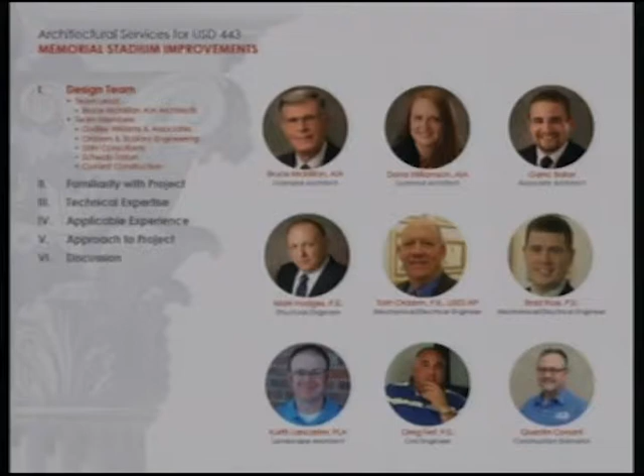We've had the opportunity to work alongside an excellent team of consultants that we bring to you for this project. I toured the facility this afternoon so I had seen it, but I had not actually walked it as well as we did this afternoon. So we feel we do bring some expertise to the project for you.

The folks we're showing you here - top row, myself, Dana, and Garrick Baker at our office in Manhattan. Mark Hodges is a structural engineer with Dudley Williams and Associates in Wichita. We've worked with that firm for most of the last 35 years, and we rely on them very heavily for our structural work. In our review this afternoon, we know there could be some structural work involved, not just with implementation of the locker rooms, restrooms, and so forth, but also the booth up on top, where you want to look at some expansion. That's going to take some additional structural evaluation - how does that get implemented and what impact is that going to have on the facility as it now stands. As I said, we would rely heavily on Dudley Williams and Mark and his team to work through that with us.

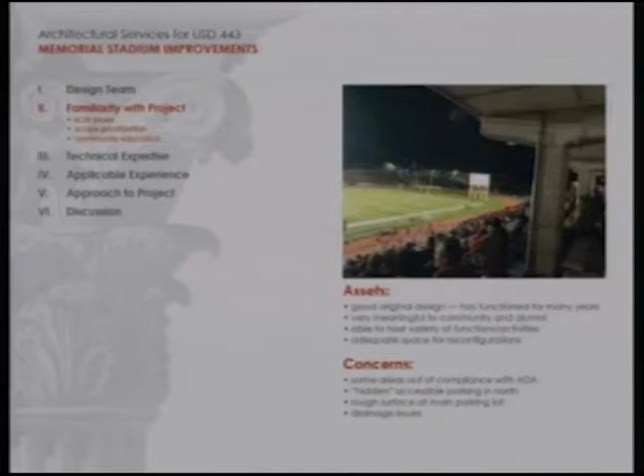So as you noted in your request for proposal, you want to do things in phases, maybe some phases together, but just however that might work for the community and for your needs. And we can definitely work with you on that.

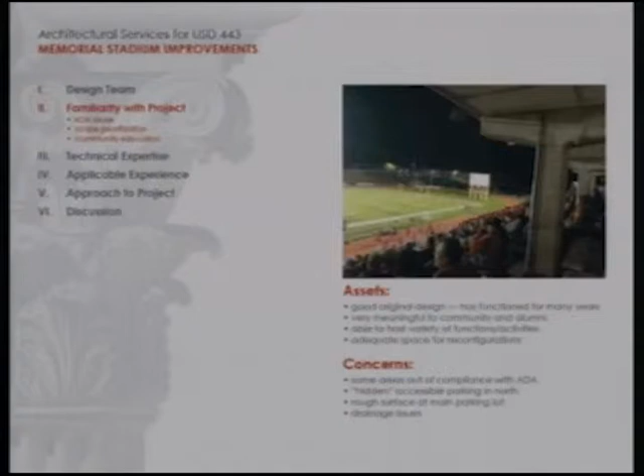We do feasibility studies, and that's probably how we would propose to begin, and that way we could investigate all of the issues that you're looking at and work through how to prioritize them, how those work into a budget, and how those would phase according to schedules as well, because there are a lot of activities going on in the stadium that we'll probably need to work around.

So those challenges that we really want to focus on would be to address the issues, as many issues as we can within a budget. And that would be something that we could work on together to determine.

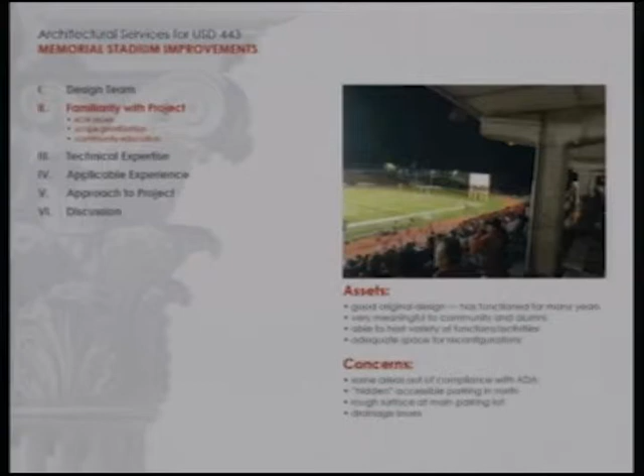We want to make sure we schedule those priorities to meet those different deadlines. And then for that phase 1, I know when I talked to Dr. Dirksen, the Shrine Bowl is kind of a goal for phase 1, and so that would be something that we might have to fast track. We can look at that later on when we talk about our approach to the project.

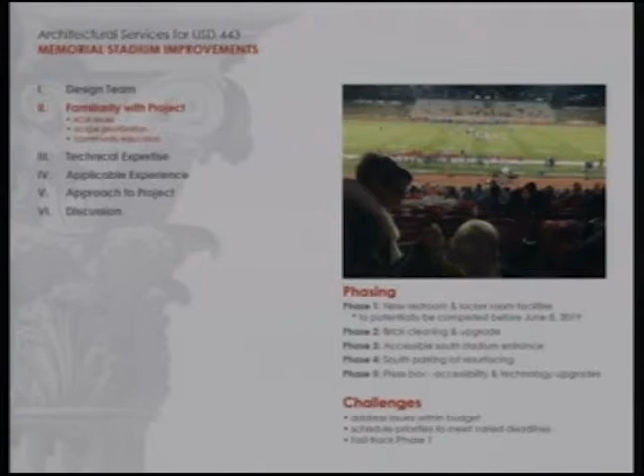Okay, Bruce? With respect to the, let me make sure I get this. There we go. I want to go to the next one. Yeah, there we go.

A little bit of background here on our team collaboration, the design skills that we bring to your project, and the cost control and deadlines. We've had the opportunity most recently to work on a very large feasibility study and master plan for USD 383 in Manhattan in conjunction with the City Commission.

The feasibility study is a large study to combine sports facilities with the school district and city-owned property and city-owned facilities. What we're showing you here is a series of study models completed for a bond issue that was just recently passed, a $129.5 million bond issue. We're working through those components as well.

A previous bond issue allowed for additions to the middle schools that will combine gymnasiums and recreation centers for city use by the school district for class and activity expansion. At a certain point in the day, maybe 3 or 4 o'clock in the afternoon through the evening hours, it reverts back to city use. Those are additions to the middle schools - we have two middle schools, Eisenhower and Anthony, in Manhattan USD 383.

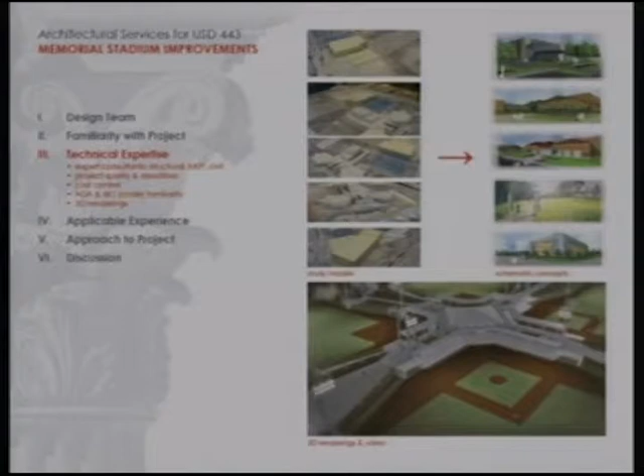The skills we've brought to these projects are a direct result of our long-term working relationship with the Parks and Recreation Department for the City of Manhattan and the Community Development Department. We've been working with Community Development since the 1980s, and through Parks and Recreation, we began working with them in 1985. We've been consistently retained over these years for projects for both departments at the city. As our original proposal indicated, we've done a considerable number of projects for USD 383, USD 320, which is Wamego, as well as we're working for St. Xavier's Catholic Schools in Junction City right now as well.

So we bring that background to your project here and series of projects, as Dana has described, in a phased implementation process. All of these projects are going in as a phased implementation as well.

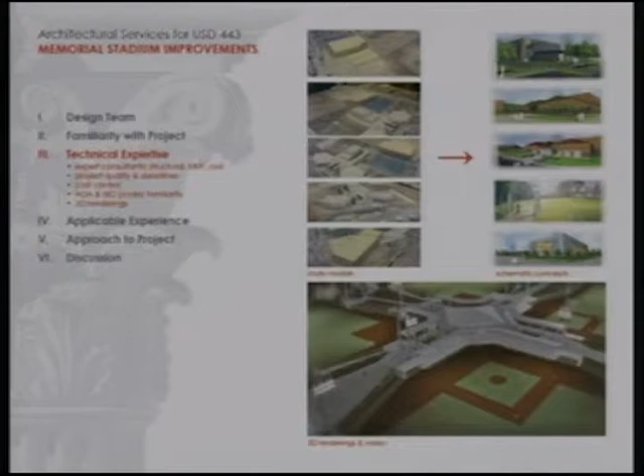How involved were you in the redevelopment of the city of Manhattan back in the 90s - the mall, the north and south districts? Basically, all of those situations were worked on with outside firms. There really was no local firm involved. The mall was done by a developer. The North District, where Hy-Vee is, that was a developer. The South District, the Arts District, again a series of developers. Okay, that makes sense, I was just curious.

The needs of each of the projects we've identified have been thoroughly researched, and we've gone through these on an individual basis. The school district, as well as the city, met multiple times on these projects as well.

A lot of the projects we've done over the years have been maintenance projects - parking lots, we've done a zillion parking lots for USD 383, bleachers, window replacement. A lot of maintenance projects have gone through our firm for the school districts we've worked with over the years.

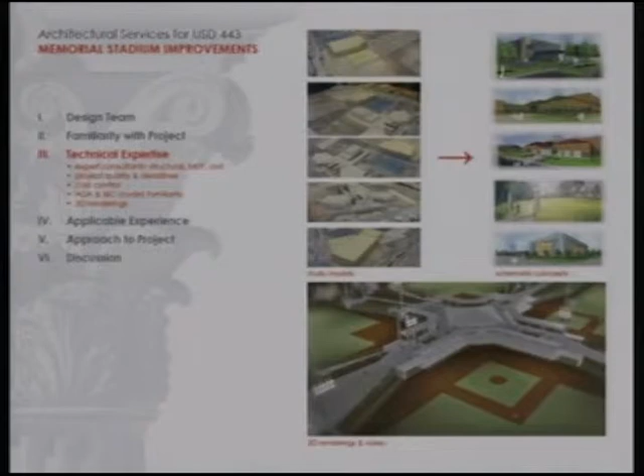The collaboration I've mentioned with our team members before - we've worked through those with all of these firms that we've represented here this evening as well.

We're known for quality design. The working drawings that we bring to a project have been observed to be some of the most detailed, highest quality, and have the fewest callbacks, clarifications, and other issues. We have very close working relationships with our local contractors, and we use firms specifically when we have the opportunity, and we understand that this is probably could be a competitively bid project. We have a contractor on board with us on that. However, that is for cost estimating purposes at this time. But we understand that there may be competitive bidding, and we're very comfortable with that as well.

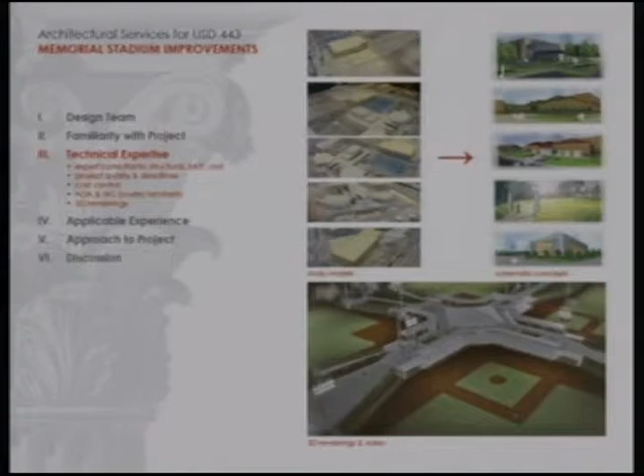Deadlines, we have been very cognizant of those kinds of issues as we have worked through these projects as well. The documents are checked, double-checked. Our consultants cross-check our documents, we cross-check their documents to be sure that we haven't lost something in a loophole somewhere.

Are there any other questions at this point? Dana, would you be the lead on this project? Yes.

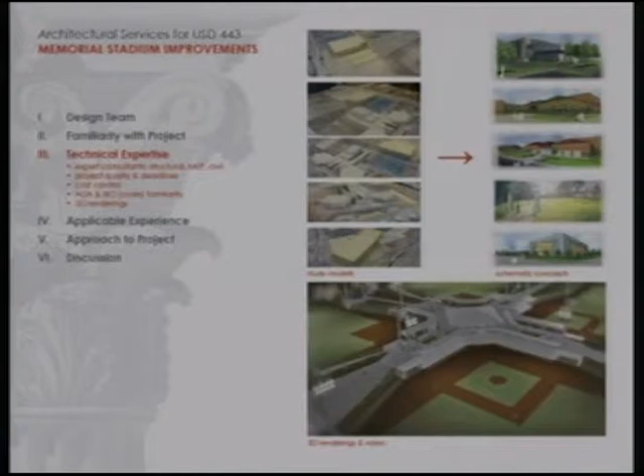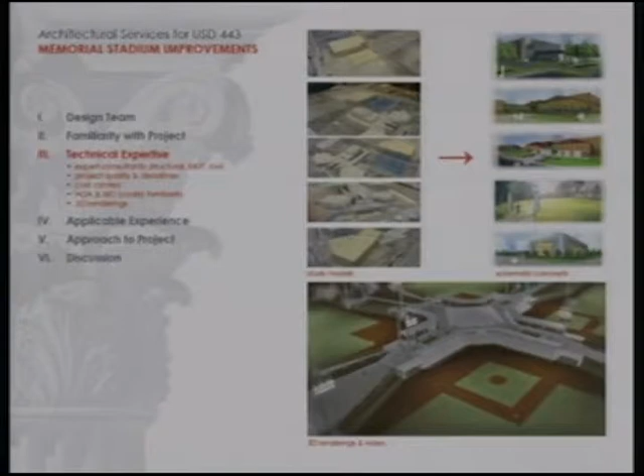Yes. We have other folks in the firm as well, and all of our document preparation is electronic through CAD systems, and we can plot, print, we can do everything all through a single server. That allows us to keep everybody in the loop on what is going on with projects. Go to the next slide.

Okay. We'll do a tag team on this one here.

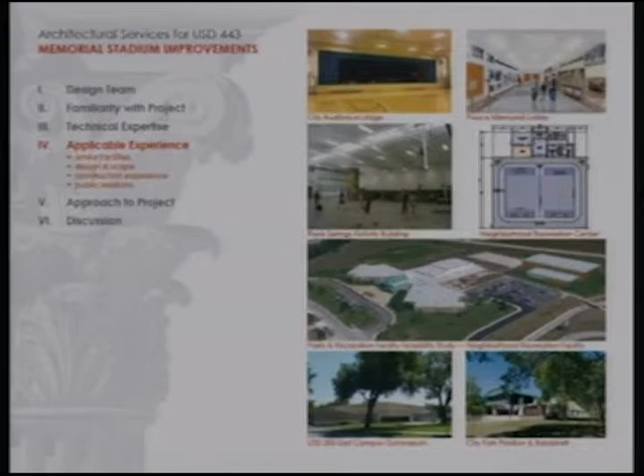As far as the similar facilities are concerned, again, these are projects I've mentioned. This project is one of the middle schools with the recreation and gymnasium component that would be attached or on an adjacent parcel for one of the recreation centers at one of the middle schools. This project is actually a predecessor to the Southeast Neighborhood project that we're working on, 17,000 square feet. Standard court, 2 cross courts, pickleball, volleyball are included as well. Locker rooms and restrooms, yes.

My pointer's not pointing. Am I dead? Maybe. In the upper right, you're way up there. I'm way up there. There you go.

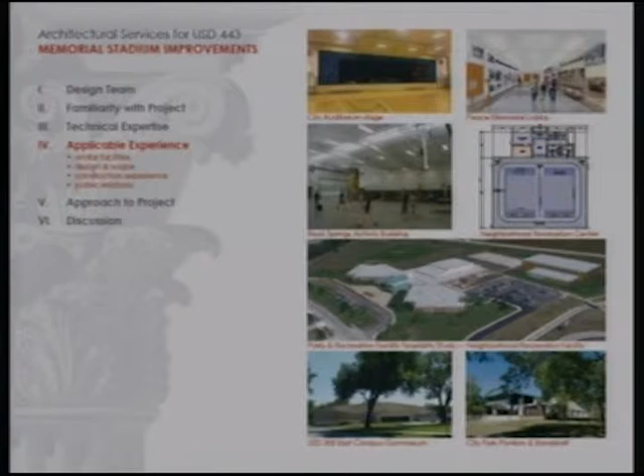There we go, okay. That is a project that we did for the city in conjunction with this auditorium renovation, which we have just finished. And this is all done through a veterans organization that is honoring those World War II veterans from Riley County.

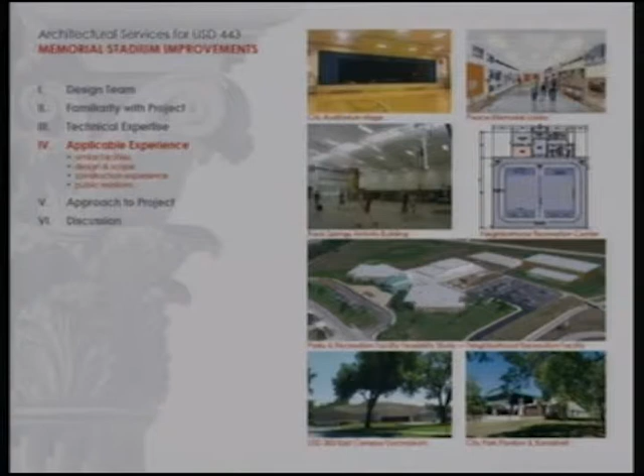Here is the gymnasium at the East Campus for the high school. With an addition, we redid that in the last bond issue, and then a large pavilion and outdoor stage area as well. So those are just some similar projects that we've had the opportunity to work on.

So our initial thoughts on how we might approach the project, going back to phase one and how we might fast track that. That is going to be pushing it, but I think we've worked out a schedule that is pretty doable, and I've spoken with Quentin Conant, and he thinks it's doable as well. So as long as we can make decisions and everything goes right, which, you know, construction.

But just thinking about getting the contracts approved by the end of the year, we can get started in the new year, get going on schematic design in January, and maybe get everything approved, start working on construction documents through February. We've got 2 weeks in March, the first 2 weeks, for bidding, and then that leaves 2.5 months for construction. And then we're done before the Shrine Bowl.

So, like I said, our design philosophy is that we want to make sure your needs are met. And that means within the design, not just how it looks, but how it functions as well. Also with finance and also with your timeline, all of those needs. So we have to make sure those all coordinate. And this fast track schedule is our attempt at addressing that need. Any questions on that?

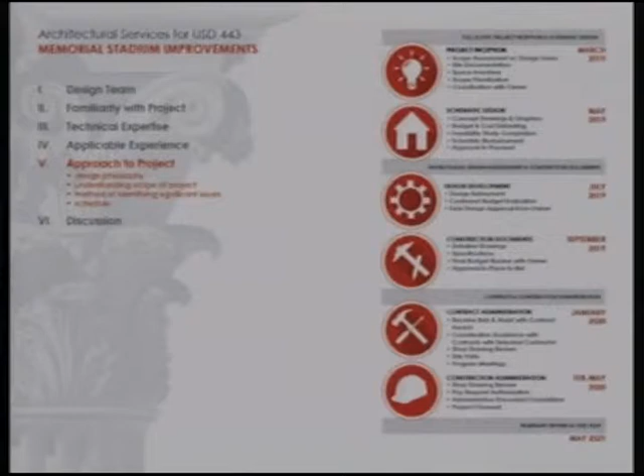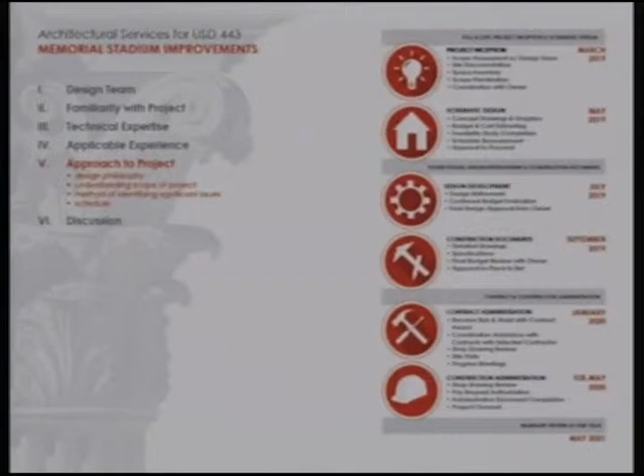All right, so then after design is finished on phase one and it's under construction, we can start thinking about identifying the rest of the issues, maybe starting on that feasibility study. That starts with meetings with you, with other key stakeholders, and working on identifying all the issues, investigating, making sure we have everything covered, and then we can get into schematic design in early or late spring of next year.

Work through design development and construction documents through the summer and the fall. And then it looks like we've shown maybe starting contract administration, working with the contractor, finding a contractor at the new year of 2020. And then once we get a contractor, we can work with them to figure out that schedule to work around all the events and all the people who need to use the stadium while it's under construction.

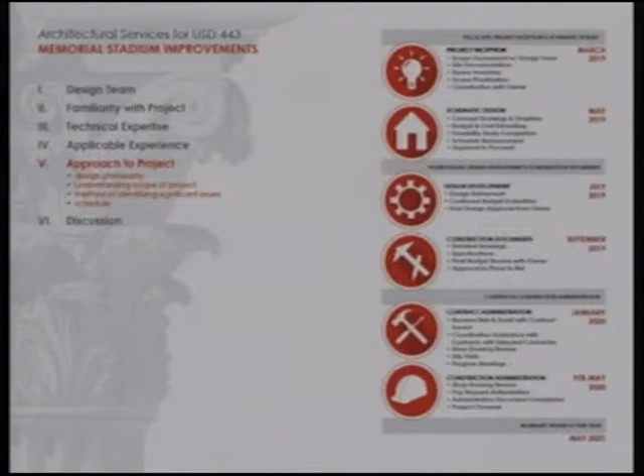Bruce, do you have anything to add to that? No, only that we're very cognizant of how much use this facility gets. When we were in there even this afternoon, the college track team was in there. The gate was open, by the way. We didn't anticipate that, but it was. So it was all secured, but we had an opportunity to really see what is physically there.

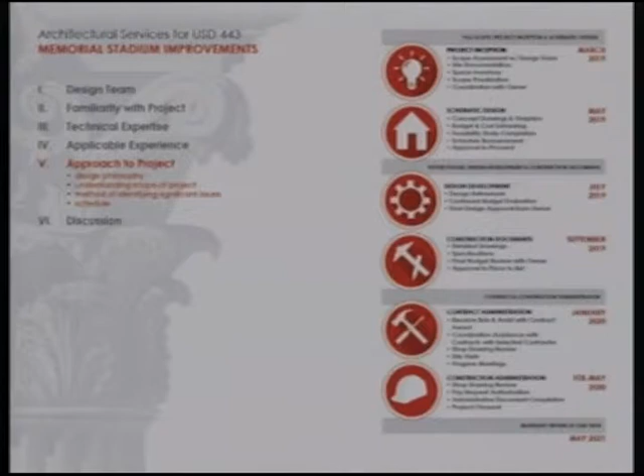And the structure, as Dana said, looks to be just in very good condition. Other than the press box, we may need to address how that modification might be taken into consideration there as far as that's concerned. But well, with that, we'll open it up for questions.

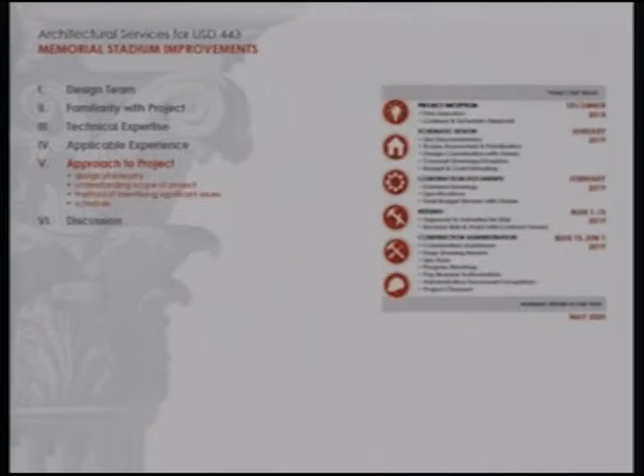On phase one, that's a pretty strict timeline. What would be the problems to meeting that? I mean, would weather hold you up? I'm just asking questions.

I think some of the initial problems would be during the design if we have problems making decisions on what is involved in that design, and that's within the design team, or that's between the design team and you. But I mean, those are easily overcome.

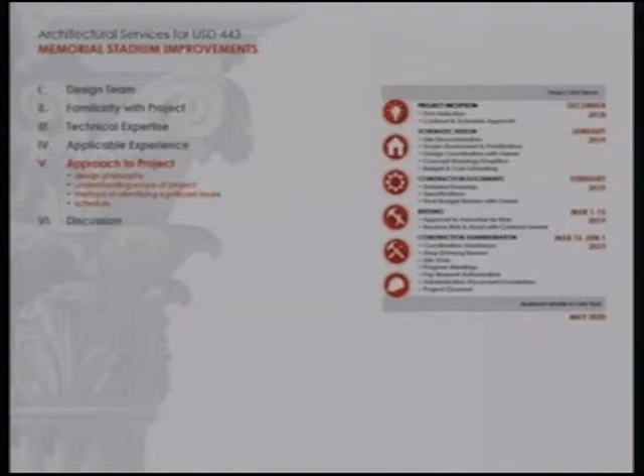But another problem that might come up is that drainage issue under the east stands that we talked about. It could be an easy fix, or it could be a much bigger fix. And if it's a bigger fix, obviously that's going to...

Could you determine the method, how big a fix it was? Is that by observation, or do you have to really get into it first? We wouldn't have to totally get into it, but there'd have to be investigative measures taken.

We would certainly want our civil consultant to take a look at this. And obviously, there needs to be some type of a subsurface drain issue that might have to go in there. If we can't get a slope that would work with that pavement under there, we'd have to get into some type of subsurface arrangement, I would imagine. His initial thought was it looked like there just wasn't a drain that was working, or maybe it was clogged, so we're just looking into the drainage issues that are there.

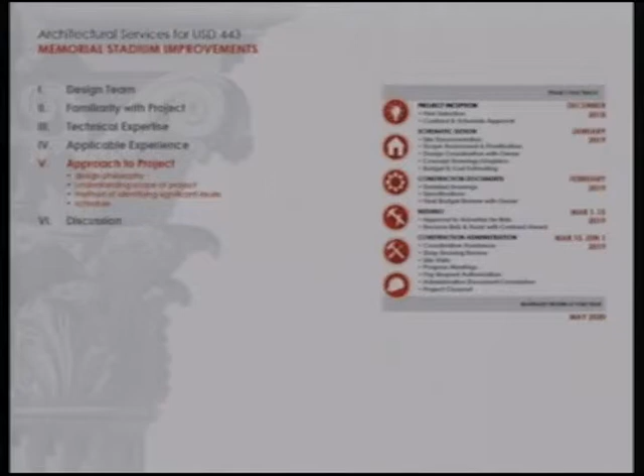At the risk of being a lone soldier out here, I'll hide my face when I say this, but if the Shrine Bowl isn't the end-all be-all, and we're not building for the Shrine Bowl, we're building for USD 443 in my mind, will what we get done before that deadline you've marked off as the Shrine Bowl -- I can feel daggers already from high school -- but will we be able to have a quality project?

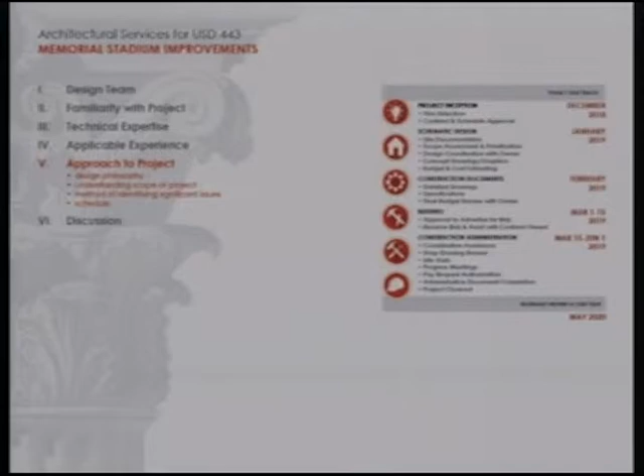What I'm saying is I don't want to just mishmash it. I want it to be, if we're going to do it, let's do it right. Let's not rush it for any particular one event, but make it a great facility so that in another 50 years, if somebody wants to build on and improve it even more, they can. But that's my concern: will it be okay, we do this, and then we have to undo this to do this, and then we have to undo this to do that?

No, that would not be our goal. Every time we do one of these phase projects, we try as hard as we can up front to figure out what needs to be done in this first phase so that we're not undoing as we do continuous phases. That's just a waste of money and time.

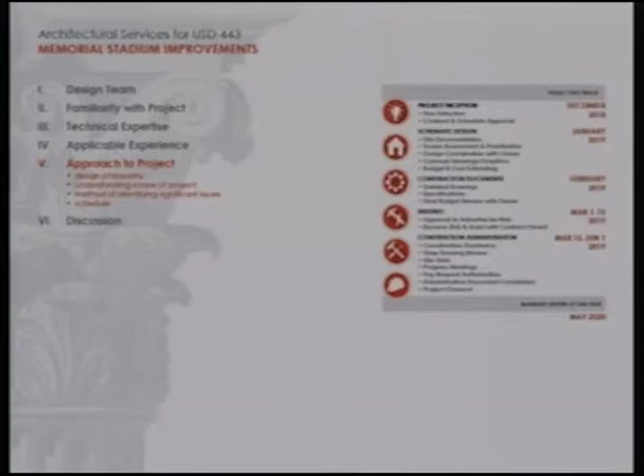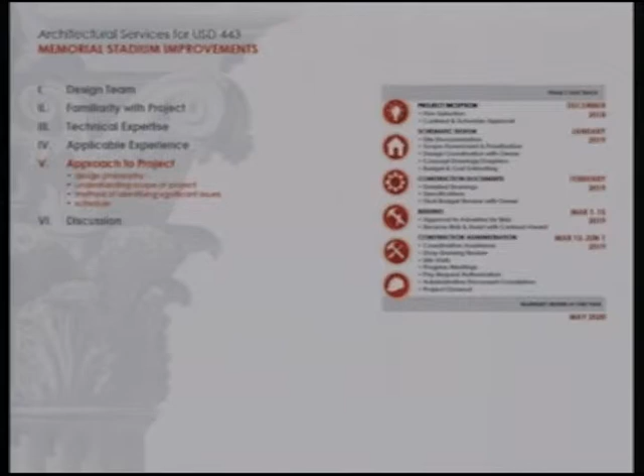I would like for the school boards 50 years from now to say what you said -- that they did a good job 50 years ago -- because that's great to know that we have a great structure still. It'd be worse if we were talking about some really significant structural problems. And that's not going to crimp our style in how we build anything. We won't say, oh, you can't do that now because we already did this.

Logically, if that is a goal to get, it's working with the locker rooms, it's working with the restrooms, and getting those are defined spaces right now. With that being there, you've got the four walls already to work with. Depending upon labor availability, construction availability, weather, and so forth, there should be enough time, because all of the plumbing is already there, as long as anything subsurface is still in good shape, rearranging should not be an enormous difficult problem. We have not investigated exactly what all of the existing ramifications are, but the point to start with, you have the infrastructure to make that possibly work.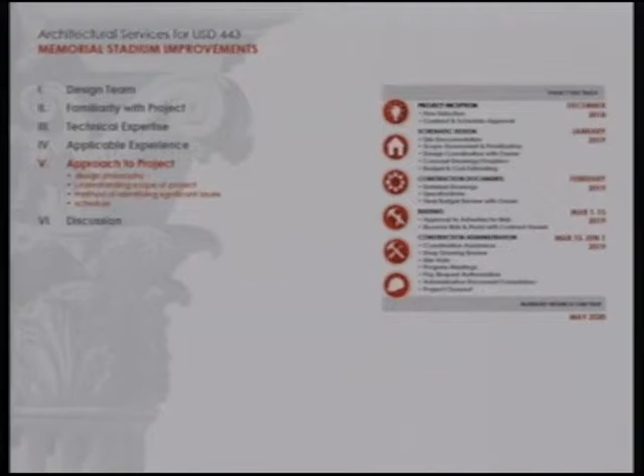Tammy and Pamela bring up a good point though. If we had no timeline, would you still recommend that we do these three phases in this order? If you had no set timeline, I would probably recommend that all of your phases be investigated in an initial feasibility study first, so that you can make sure they all fit together, make sure they're in the right priority, done at the right time.

Is this the right priority to get the best job we can? That's what we're asking. He's asking for a comprehensive feasibility study tonight. It really depends on what your goals are. Yeah, that's true, but I just don't want to do step 3 first, if it caused some structural problem. That's a good point.

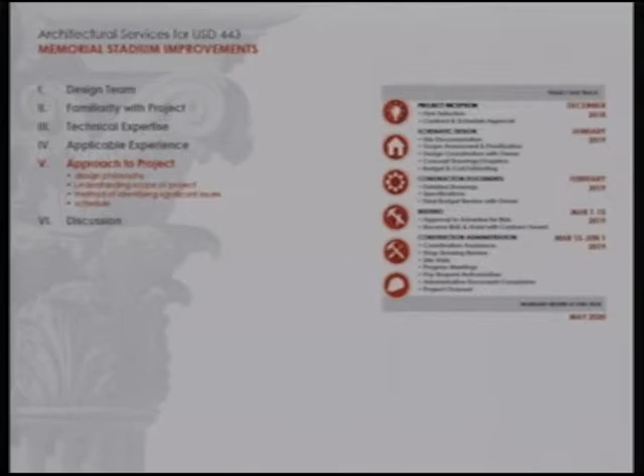Well, the press box, if we eventually do that, and especially with potentially an elevator going in, where would that elevator go? It might go in there, in one of those areas. That's just something we don't know. So that is a potential conflict.

Can you do the feasibility study overall first, and then break it into 3 phases, or however many phases? There wouldn't be time to do the feasibility study before that timeline, but that's up to you whether that's important.

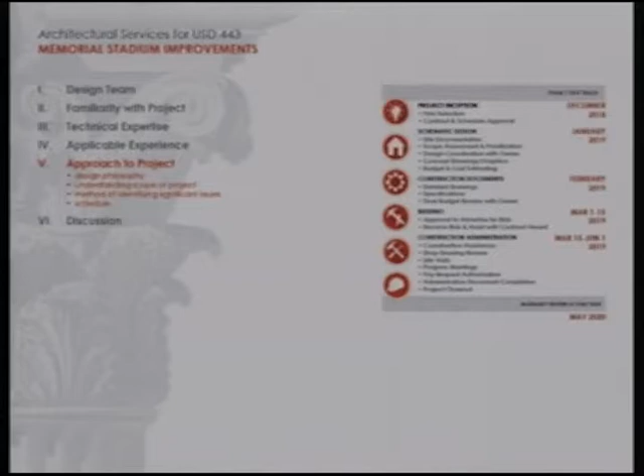We can fast-track a feasibility study. However, the feasibility study depends upon the decision-making process that goes into it. What are your priorities? If you are clear, concise, and can give us the direction that you cumulatively have, we can fold right into that. I'm not sure if I'm hearing different opinions or not, but the more concise and the more direction the board has among yourselves, the easier it's going to be for us to give you the follow-up direction you're asking for, if that makes sense.

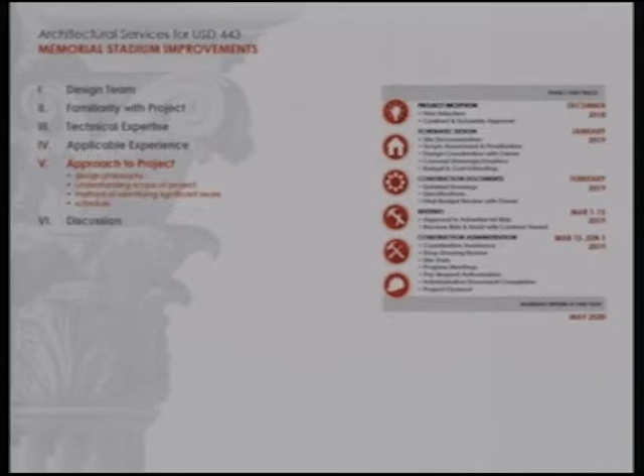I think the only thing I'm concerned about is you mentioned the elevator. If we just knew where step 1 would affect phase 2 or phase 3, and that there were no conflicts, we could do phase 1 standalone, and we wouldn't have to rip anything out we did in phase 1 to do 2 and 3. Same thing with 2 and 3. You don't want to tear something out that you've already done.

We understand that the press box is too small, is what we understand. Depending upon, and the trigger on that one is, yes, you've got a good structure there, but until we get our structural engineer in to look at the column support for what is there, can it carry more, do we have to beef that up, does it have to come down in order to enlarge the press box, or what does your ideal press box look like? I'm not sure we know that yet.

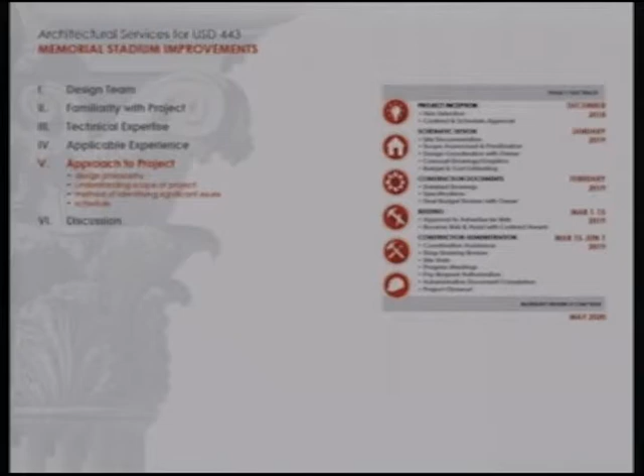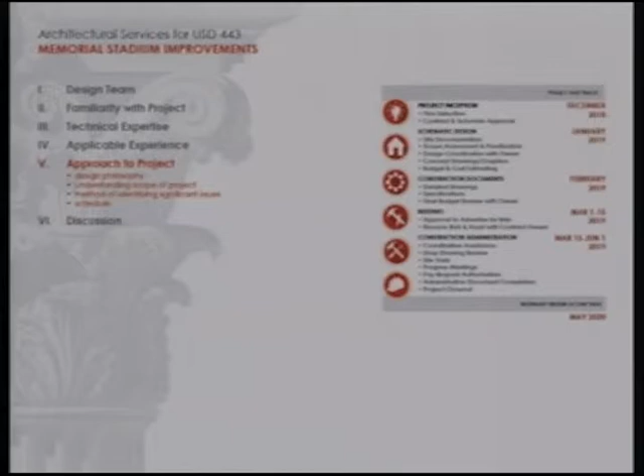So that is going to have to weigh pretty heavily into the actual process as we look at how that elevator and that component play into the overall picture. As I mentioned a moment ago, the locker rooms and restroom configurations and that switching around, I don't see those things moving. I think those are there.

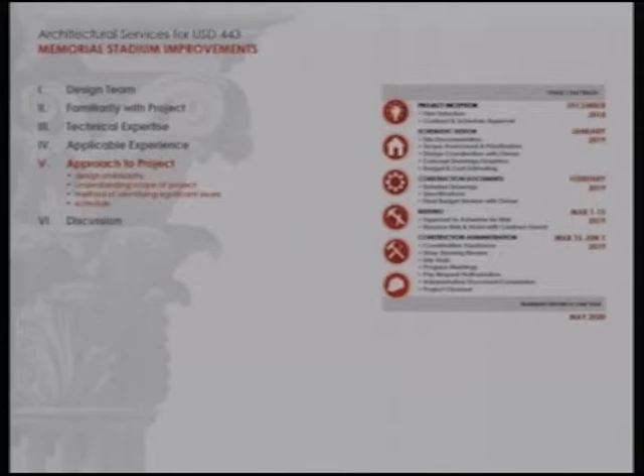Building an elevator tower of some kind to get up to that press box, yes, it's going to be messy because you're going to be tearing some things out. But I don't see that, and I said this to Dana when we were walking around, and I could be way off base here, I see that sort of going on the back side, if there's room to do it, of the whole structure so that we're not punching holes through the stadium, through the bleachers and all that. I think that's the only way to get that in there and get it behind the structure that's already there somehow. But I'm just assuming some things now.

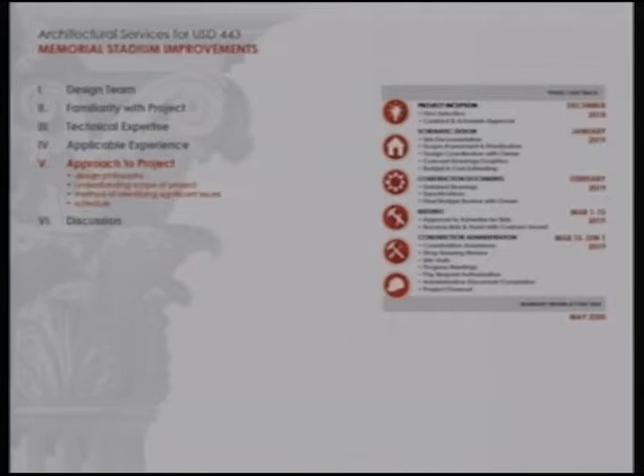So to answer that question, I don't see the impact. But that's the big elephant in the room in some capacity here.

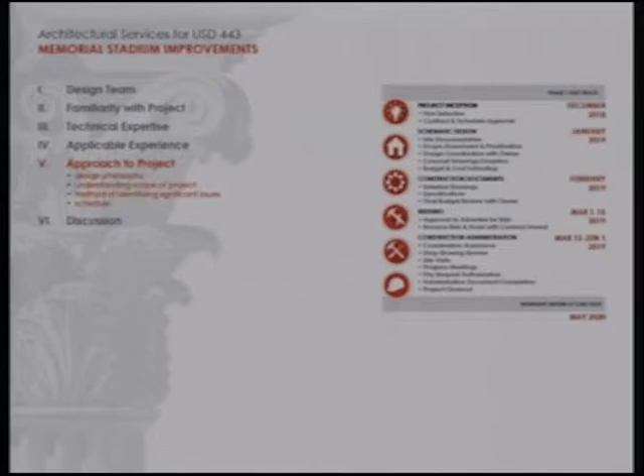First dental was about $500,000. The library's not finished yet, so we don't have that figure, but it's close.

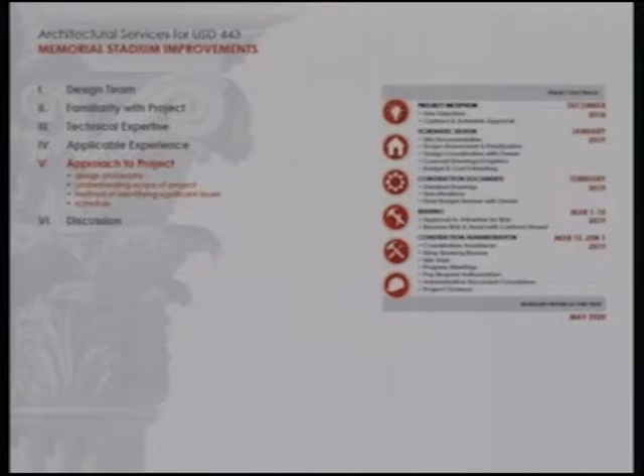Okay, any other questions? Very good, thank you. All right. We appreciate your time greatly.

Thank you. We have 2 more presentations that will be following after this one, and then later in the agenda we do look towards the ranking, because I like what you said about trying to work with getting contracts and getting it moving so we can move forward. So we'll be in touch this week, I'm sure.

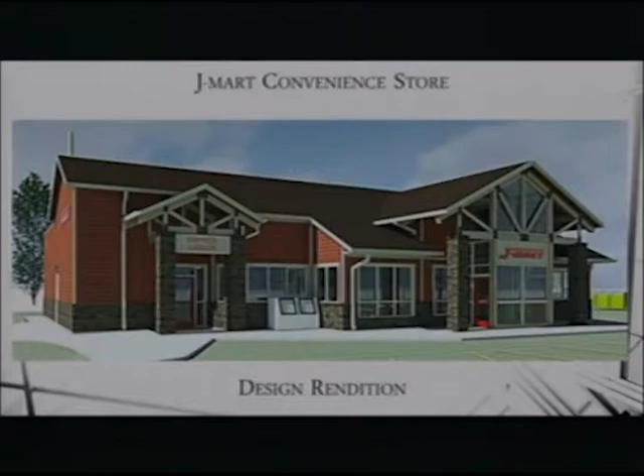This was another one we just recently finished—an old convenience store on the west side of Garden City. They bulldozed it and built a new one on that facility. They could have built around the existing structure, but to be cost effective, it was going to cost more to try to use it rather than gut it out, tear it down, and rebuild part of it.

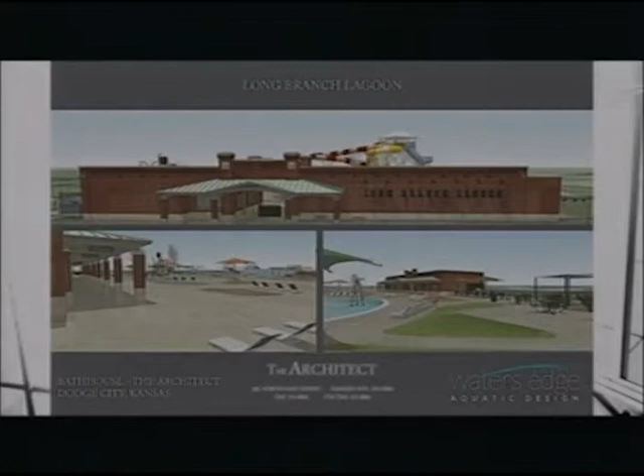Here in Dodge City, one of the recreational facilities that probably most closely matches what you're trying to do was the Long Branch Lagoon. We were responsible for the locker rooms, the concessions, the administrative building, and the building out back of the park that houses all the pumps and filtration system that runs the whole system. We thought it turned out pretty well.

It was a nice, fun project because the theme was tying into historic Dodge City, so we were able to pick up the brick and detailing of a lot of the buildings downtown. Both Manuel and I were involved with that project, and this one.

This one was a design-build project with Building Solutions. Ford County acquired a very large metal building that originally was going to be a manufacturing facility in Scott City, and that didn't go through. So our task was to use that building, and we added on all the toilets and facility rooms in the front, and then the horse arena on the side.

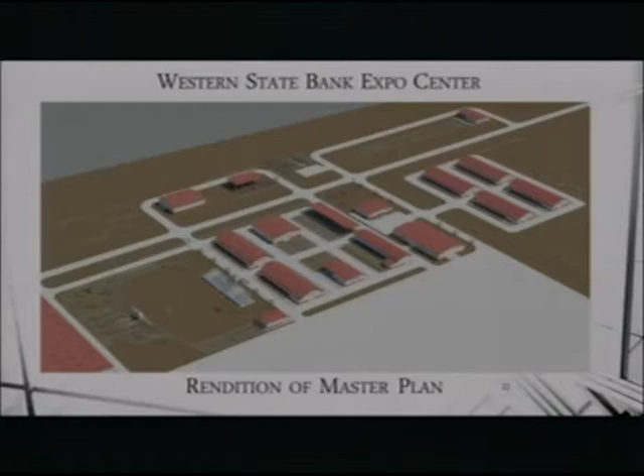At one point, the college was looking at moving equestrian and horse science and animal science out to that area, so we had done a master plan for that. They ended up not doing that, but we're good at kind of planning ahead also, and that may have some implications with what you're trying to do too, with the different phases and how things work best. It's not necessarily just a matter of doing this one, this one, this one, because phase one may implicate how you do phase two and phase three and phase four. So planning how to do all those is one of the things I really like to do.

So that's a good project to compare it to.

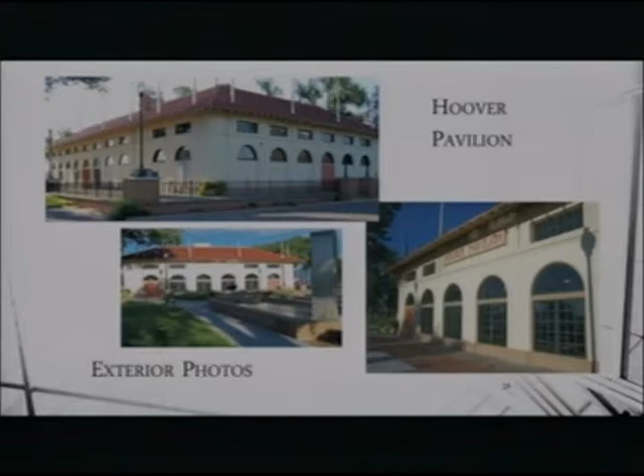The Hoover Pavilion was one of those we phased over about a 7-year period with the city. Paul Lewis and I worked together real close on that one. It had just been neglected and abused for a lot of years, but they saw the potential it had to be basically a moneymaker for the city. So we systematically went in and redid the entire thing, upgraded the roof, upgraded the mechanical and air conditioning system, all new windows and floor and ceiling, and it had all new toilets and a serving kitchen in it.

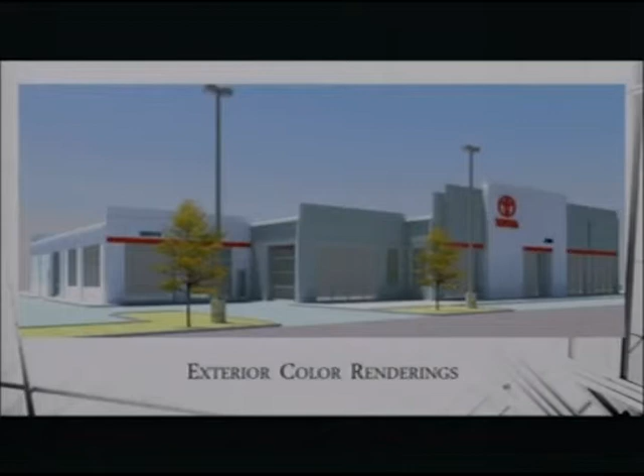With the stadium, a lot of what you're looking at is down under, so a rendering of toilets may not be as sexy as some of these other ones, but it does give you a fairly good idea of some capabilities that we have.

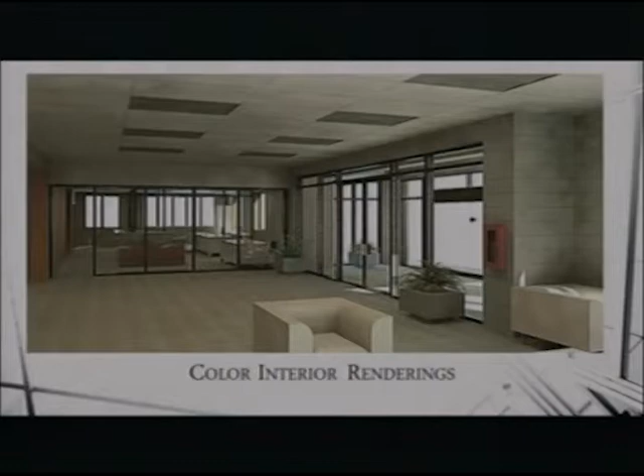In your phasing, when we were discussing this in the boardroom with your information, it appears there may be some options and questions about what we can do on the south end and the north end. It may come down to how many toilets can we get by code on each side, and do we still have room for locker rooms and that sort of thing. There are a lot of things whoever you hire will need to look at, some outside of that underneath-the-stands area. Good renderings at that point can help you sell it to the public, sell it to yourselves, and fine-tune what you want this facility to look like, since not much has been done since 1967.

The slideshow. That's the end of the slideshow.

The experience that I've had in this area goes back a long ways. We've worked with every contractor in southwest Kansas. We've done traditional design bid build work, construction management work, and design build work. They all have their strengths and weaknesses. And I believe you've done quite a bit of CM work in the last few years.

CM has some advantages if done right, and it has no advantages if it's not done right. So the selection of a contractor for a CM project is really pretty important. But we're capable of doing it with any of them. All boards work a little bit different, so there's no standard way of our working with you.

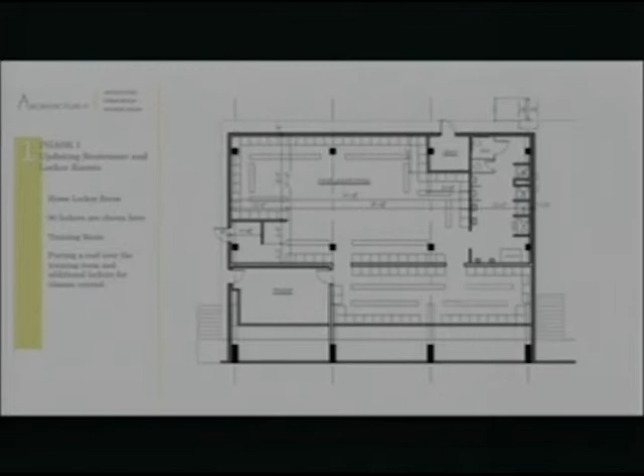So the bottom part of that is actually not finished space now, so we'll have to do some additional work there as well. The bathroom count here, we've increased the restroom count for both men's and women's, and we also provided 2 family restrooms as well.

In visiting with the city of Dodge City, they were willing to let us design around a 3,500 capacity for the stadium, and 15% less than that.

Actually, we all know we could probably seat as many as 5,000 there, but they're willing to let us work with a little lesser number, so that governs how many toilets, urinals, and lavatories we need and so forth.

So that's kind of where we came up with those numbers in the remodeling of those areas.

Now, on the east side, we just have 2 small restrooms, a storage area, and a concession area. Let's talk about the storage area - it has quite a few lawnmowers and other pieces of equipment stored in there. Not quite sure why - when you have artificial turf, you need all those old lawnmowers.

So we're saying let's clean that out and utilize that space. That's a special project.

So we're going to take that storage space that's got lawn equipment in it and expand that to create a visitor's locker room, again with a capacity of up to 90 athletes.

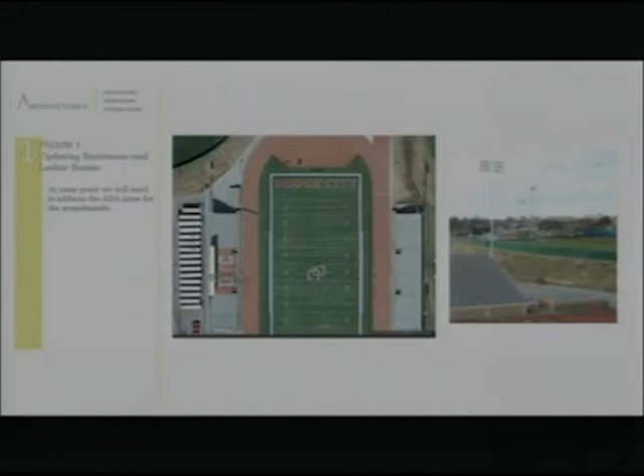Back to that number we talked about with 3,500 capacity, the ADA standards of 2010 would require us to have 26 wheelchair spaces with an accompanying seat as well.

So if we need to do 26, then we've got to intersperse those amongst the stands on both sides of the field.

And quite frankly, when we talk about our press box in the future, we're talking about an elevator to that press box - that will help us get people to the stands. I'm not sure what we're going to do on the east side with stands for another elevator. So that's an area we'll talk about in the future.

But that's kind of one of the things we wanted to bring up - the handicap situation really creates some havoc for us, and there's no leeway in that.

It's a civil rights scenario, and you probably all know this. If somebody feels like they're being discriminated against, they just need to visit the county attorney, and then you suddenly have a lawsuit. There's no grandfather clause, there's no way around it. It's just one of those things we have to address.

So you're saying that if we put an elevator on the home team side, we have to have a way, an elevator, a lift, or something to get people to those same type seats on the visitor side. Well, if I'm a visitor and I'm in a wheelchair, I want to sit with my team, right? So that would be a discriminatory thing if you didn't provide them a space for that. And that's the snag you run into there.

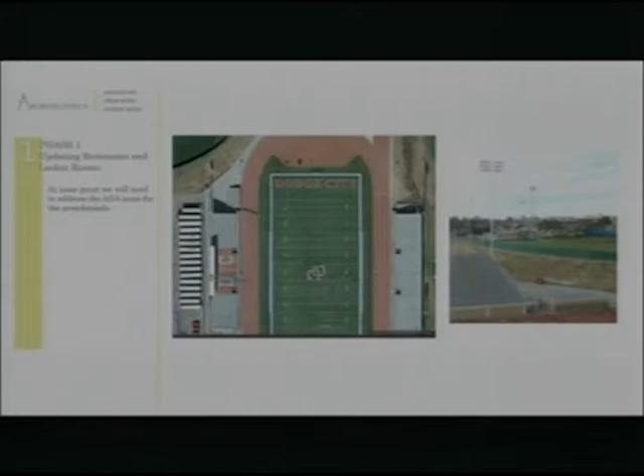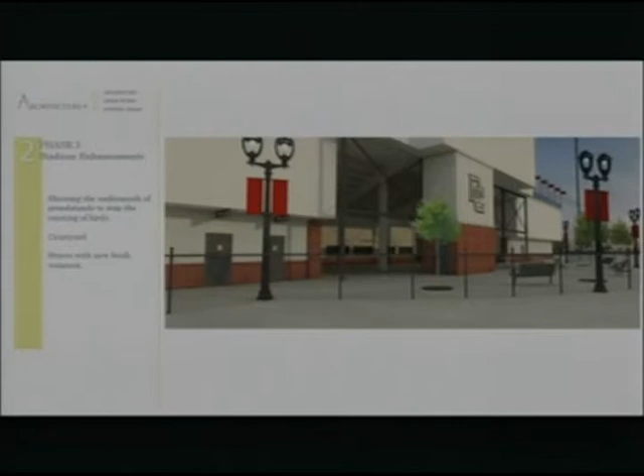But this would really clean up the back side of the stadium and the large expanses of white metal there. Doesn't have to be white, of course, but it gives you an opportunity for some graphics and things of that nature there. And then we kind of created a courtyard around that area so that if you're down there for concessions, you've got a little room to spread out and talk and visit. There's another view of it, giving you a better look at what the backside of that stadium could look like. As you can see, we've got a lot of canvas there we could use to put graphics and other things on.

Again, not handicap accessible, so we're looking to do some things there. This is our phase 3, which is an entrance to the stadium. What we're thinking of is regrading this complete parking lot from the street all the way up to this, coming in at grade level, no steps anywhere within the parking lot or the entrance building. This entrance building could be a ticket outlet, and it's got two courtyards on either side, but we also have an idea here for that area as well.

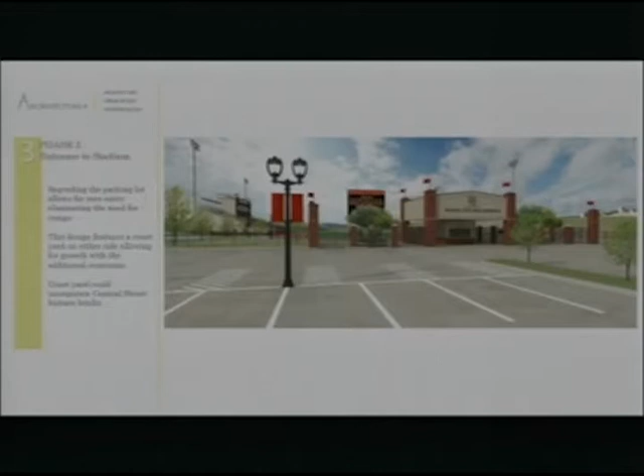If we look at the next slide, we've put restrooms on either side of that ticket outlet, and our thought was we could really create a nice game day experience here with this regraded landscaped parking lot with these restrooms. Much like they do at Kansas State University, before the game starts you can't go into the stadium, so the gates are locked, but the outside two doors on those restrooms are unlocked, so tailgaters can go use the restrooms. Then when it's time for the stadium to open, they lock those two outside doors, and the inside doors become unlocked, and they're stadium restrooms. So it gives us an opportunity to create a real nice game day atmosphere here.

This is what it would look like with landscaped areas, and that's another thing we're trying to address. The city of Dodge has a heat island ordinance about landscaping parking lots to keep from creating a tremendous amount of heat in those areas, so it makes it a more comfortable space.

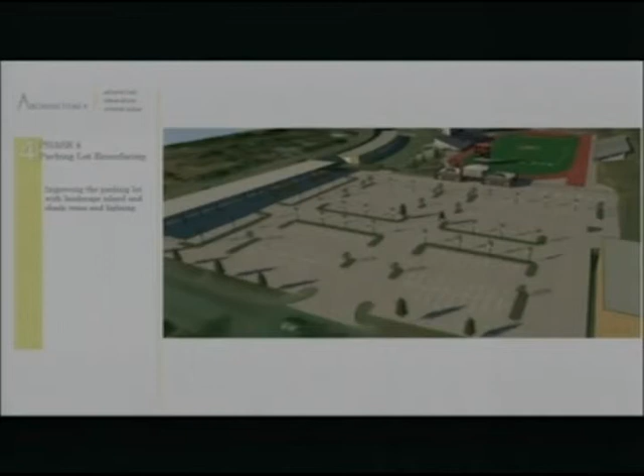The area we see on the left-hand side, or the upper corner of that, looks like a kind of roof structure. What we're thinking about there is — that is where the embankment goes up to the street. We're thinking about excavating that area, putting a retaining wall in, and putting a roof over that area, for two purposes. One, this would be a place we could park buses, overnight parking. But the other thing is — if we looked at that slide before, can you go back to that?

See that long skinny rectangle with a little white rectangle beside it, on the left-hand side of that? That's the bus transfer area you're all probably aware of, where several hundred elementary students come on a bus and switch buses there. It's just kind of a fenced-in area. There's no protection from the heat of the sun in the fall and the spring, no protection from rain, snow, and so forth. So we're thinking that could be enhanced quite a bit by doing some things for them, giving them an everyday good experience, not just a game day experience, but an everyday experience for those children. So that's kind of what we're thinking there as a possibility, and we've looked at some options there.

We think that parking lot has potential, if we can move those buses out to that facility we showed you before or to another location. That lot could be reserved parking, reserved seats, or handicap parking, because it's going to be right there where handicap folks can access an elevator and get into the stadium. So we think that lot has a lot more potential than just being bus storage, and that's another option we think could be explored. The bus barn could stay where it is, and they could still do maintenance on the buses, but it's got some potential there. So we like that idea.

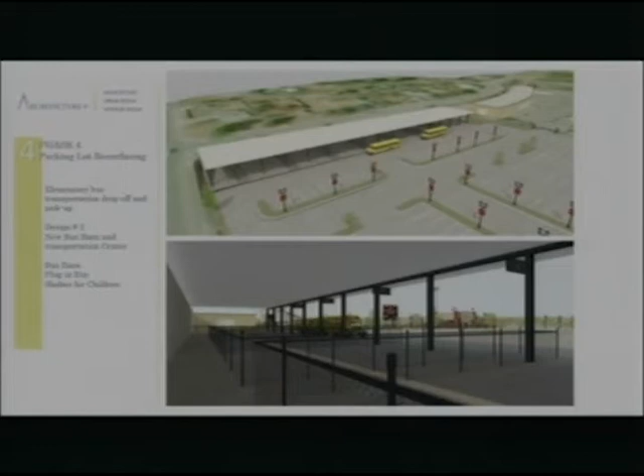Now, the press box - this is the fifth leg, I guess, of the master plan. Presently, we have a press box that is pretty inadequate, not accessible, things of that nature. We did have our structural engineer, who has done several press boxes listed in the brochure. I think he's done Gowans Stadium at Hutchinson. He's done work at Sterling, various other places.

He came out and looked at our structure and the original plans for the concrete supports for that particular situation. We showed him some ideas we have on what we might be able to do, and he said our structural system is good to do that. So it's not going to take additional structural supports other than what we need for stairs, elevator, and things of that nature.

The concrete beams and columns that are there are more than adequate to handle a new press box. What we're looking at here is a 2-level press box. The lower level would take up some of the seats in the stands, but in turn we're going to make suites there, so they could be another revenue source. Maybe somebody wants to have a suite. And so we have an area there for spectator seating in the lower level.

The upper level would be the press box functions. On either end of that, we have platforms for video, television, whatever, recording of events. We also put a restroom, a handicap accessible restroom, in each of the 2 levels of the press box.

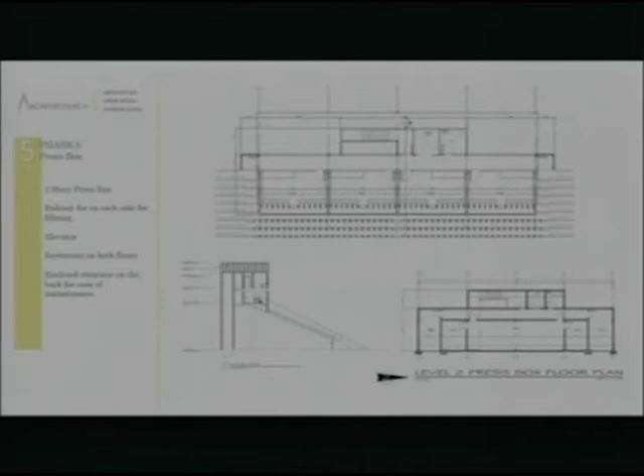If we were to use the elevators to access the top level or the middle level, either one, however we work it out, we can then incorporate some seating at the top of the stands for the handicap folks as well. So there's some options there for you as we look at it.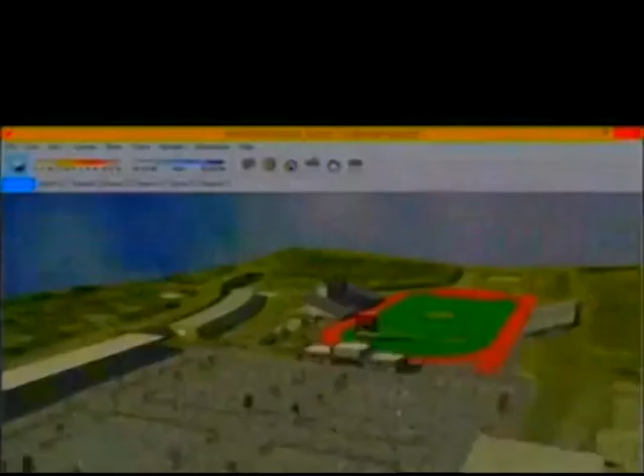Anything else? Any questions? Anybody have anything they want to ask about this? If you want to kind of look at what this is, Natalie can rotate this around and fly you around the situation if you want to look at certain things.

One of the things we talked about with this ticket building and restrooms area is where that needs to be oriented in relation to the stadium. Right now, as this is sitting, we have an access aisle that comes right up to it, a drive aisle really, that lines up with 3rd Street. And so it's offset from the stadium.

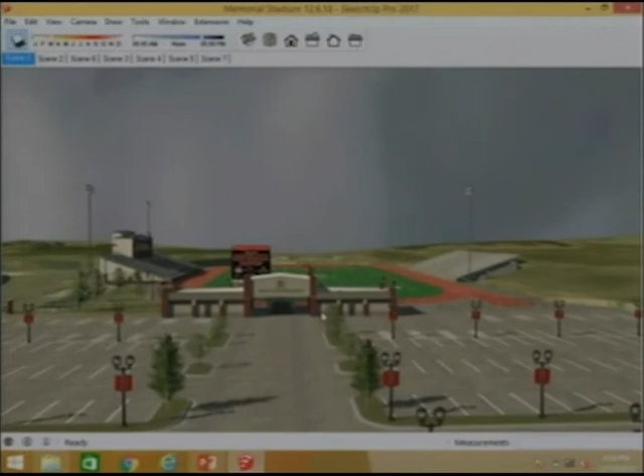And then of course you have the large scoreboard there. So it's kind of a question of which place do you put this. We ended up leaving it oriented with the street, because I don't think anybody for the city of Dodge wants us to relocate the street intersection. So we laid it out this way, but there are some options there we can talk about as well.

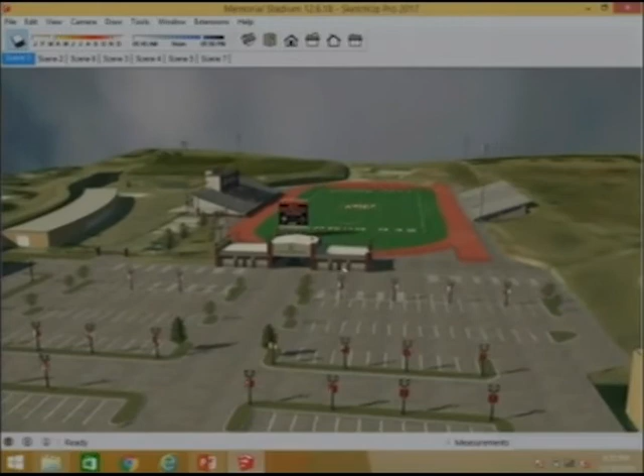Questions? What do you see as a timeline if you were to do this in phases? What would you see as timelines to go? Well, I guess that's kind of hard to define, but I would recommend we probably look at this as a phased project.

Because honestly, if we're talking about trying to accomplish all of this at one time, it would hinder the use of the stadium. And we know it's a busy place between football in the fall and soccer and track and everything of that nature. So if the projects are broken down into smaller pieces, then we can look at projects that might be as little as 4 months to as long as 8 months or so. You just have to establish the priorities of what needs to be done.

The parking lot would be one of those things that you could probably do in a summer and not interrupt any usage there.

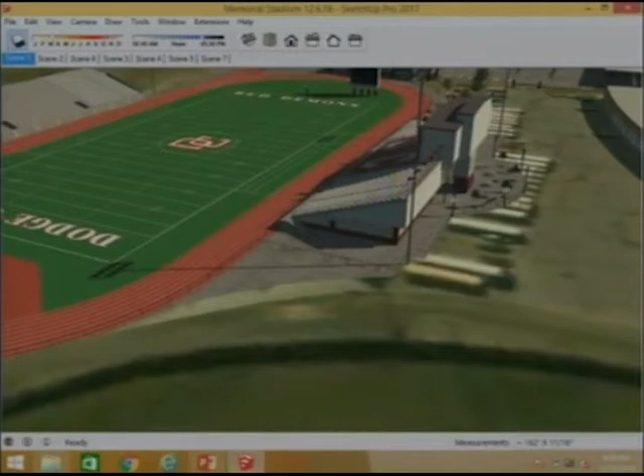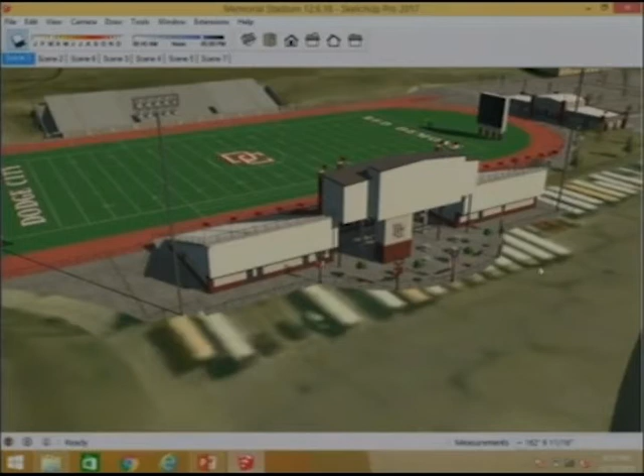The work under the grandstands in both areas, as far as restrooms and locker rooms, those are probably fairly small projects. The advantage or the best way to do those is to have the project designed and then bid, and all the materials on hand before they start the project. Because we all know, or at least I do from all the years' experience, you'll have delays in certain things that throw your schedule off. So in order to keep your schedule on track, make sure you don't have anything where they're saying, 'we'll have it in 12 weeks' and it ends up being 20 weeks, things like that.

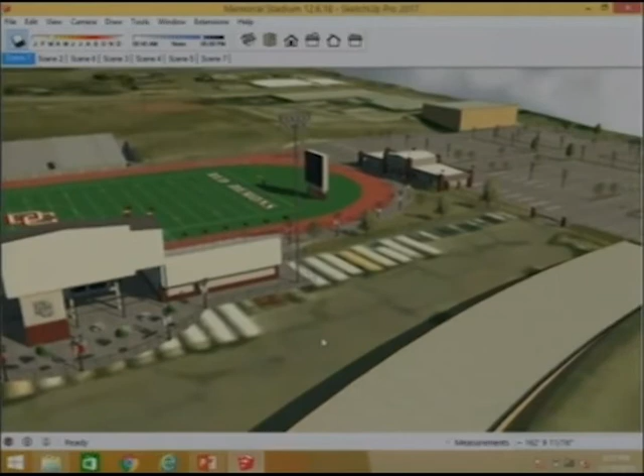Looking at the overall concept here, it's very early to say what kind of costs we're talking about, but we're in multiple millions of dollars. I'm probably pushing towards that $9 million mark for everything we've talked about.

Just the elevator to service that stadium part, being a 3-stop elevator with one stop being quite a bit longer than the other, is a little over $100,000 just for the elevator, not the shaft. And you'd need one on both sides. Would we require one on the other side as well? I haven't figured out how we may get around that. Elevator would be the easiest way to do it, but I don't want to spend that kind of money if I don't have to. The elevator over there wouldn't be as expensive because it's only a 2-stop elevator.

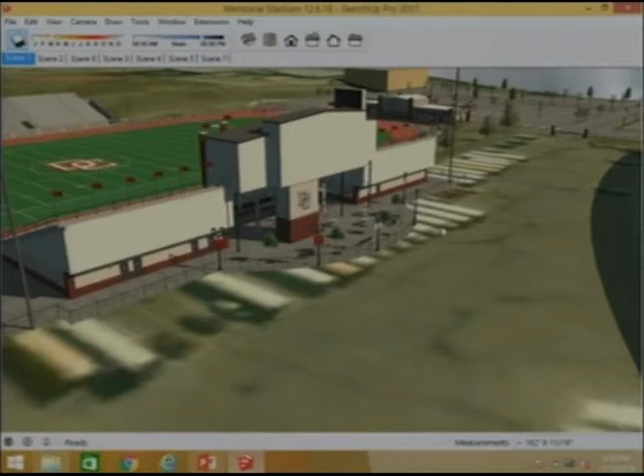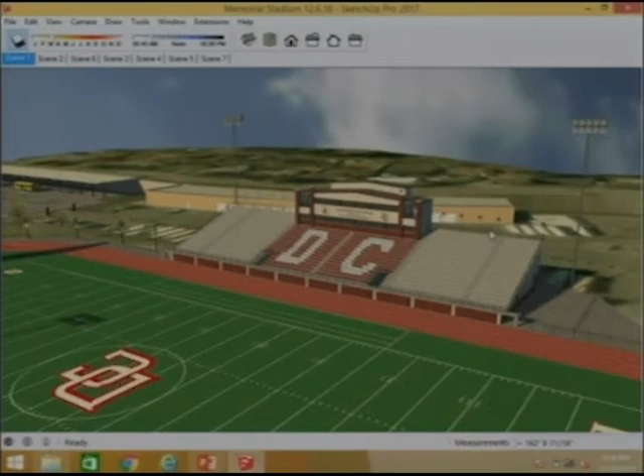So are you thinking phase 1 is doable with the timeline we want by June of this coming year? For the Shrine Bowl, probably not. It might happen, but I don't know that it can. There's a lot going on there. If you're trying to get this ready for the Shrine Bowl, I'm not sure we want to say we can get it done, but we can try. I'd hate for us to be all torn up and then the Shrine Bowl comes around and we're only halfway there. I know your aspirations are to get that Shrine Bowl on a permanent rotating basis, and I think it's great.

I think you'd have a fabulous facility for that. By giving them a good master plan and all the ideas, showing them what we're going to accomplish this year and the next 2 years, that should really carry some weight with those folks.

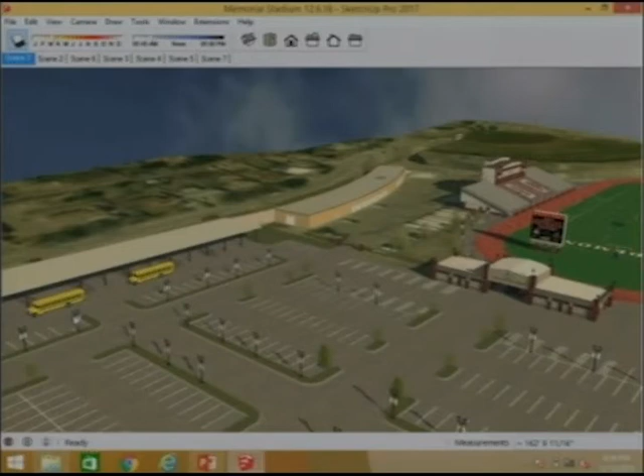I appreciate you throwing some new ideas at us. I hadn't even thought about a covered area on that west side in the parking lot, and then ball field. That's an interesting concept for parking. Well, we don't want you to think we've pre-designed what the solution should be, we just wanted to throw some ideas out that we saw. Could be modified, could be done differently.

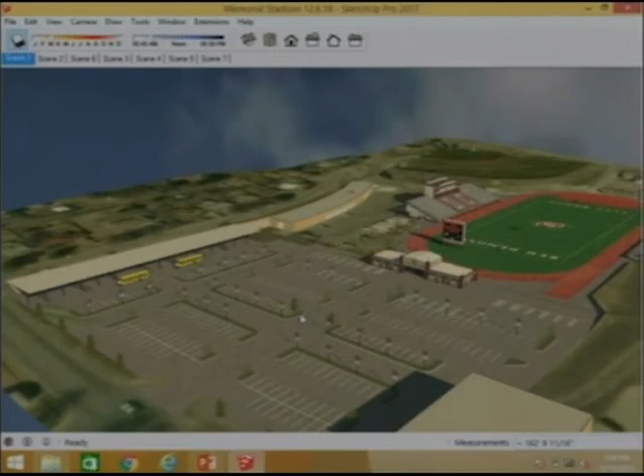We've also looked at potentially taking that bus parking or overnight parking and moving it up to the parking lots around the Civic Center, or across from the Civic Center where there's bare ground just south of the old swimming pool. There may be a possibility for that, and it may also be a place to do the transfers of the elementary kids. We know you've got investment in that bus maintenance facility behind the stadium, so we're not saying to get rid of that, but we could utilize that parking area on game nights for maybe some premium parking.

The other thing we looked at, on the right-hand side, is the drive that comes down from the little parking area behind the Early Childhood Development Center. That's in pretty bad shape and needs to be addressed. We were hoping that if we could put some parking where that ball diamond is, that parking lot could have access to that street so they don't have to come back through the stadium parking lot, because that driveway has pretty good grade to it, plus it's in bad shape. So there were some thoughts there as well.

Any other questions? The only thing you showed on the visitor side stadium was redoing the restrooms underneath, is that correct? And then we're going to do a locker room. And probably just dress up the concession stand.

One thing I failed to mention, there's an old steel stairway underneath there that comes out and opens up into the practice field area behind. It doesn't meet code, it's really a dangerous scenario. Another thing we didn't talk about is the railings on the stadium. There are so many things the new codes require that you've been able to continue using because you have really been grandfathered, but you haven't done any major renovations.

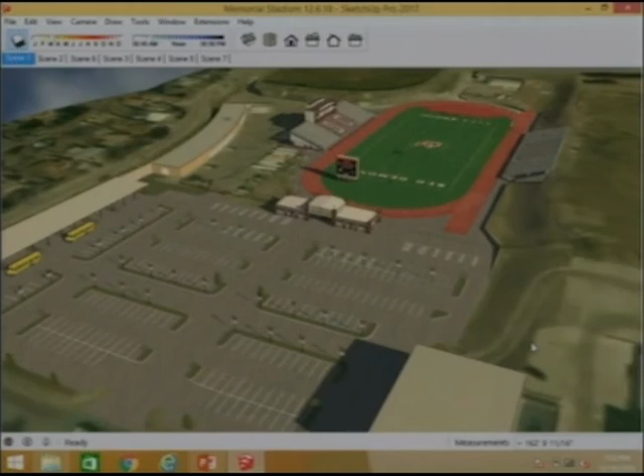That's a good point. Did you find anything, I haven't heard anything mentioned about the north end of the stadium, going on to Morgan - was there any upgrades or anything that could benefit that end?

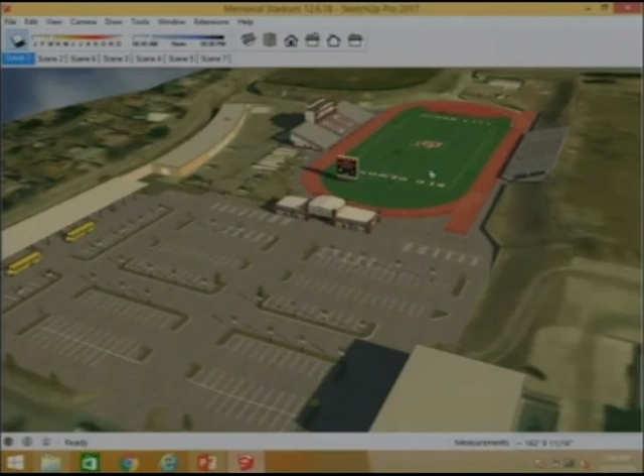We really didn't address the north end when we looked at this situation, but we know that we've got a lot of parking there, and people are going to come from the north end. We may want to consider whether we need a better pedestrian way from the north and a ticket facility there as well. Those are things to think about, because obviously we don't have enough land right here to satisfy the parking needs of the stadium, so people are going to have to park to the north, plus you have the practice facilities up there as well. So we may want to consider what we can do on that north side to enhance it and make it a good experience coming in.

I think we just wanted to address some thoughts that we had. We've been up there and spent some time, we've got our structural engineer who spent time there, we've walked the whole facility, so we've come up with some concepts and ideas on certain things. But when we talk master plan, we want to start looking at how this is going to relate to the Civic Center and your new administration building, how it relates to the practice fields, and how it relates to the other schools just across the road. So we want to think about all those things in a master plan.

Okay, any other questions? Good stuff.